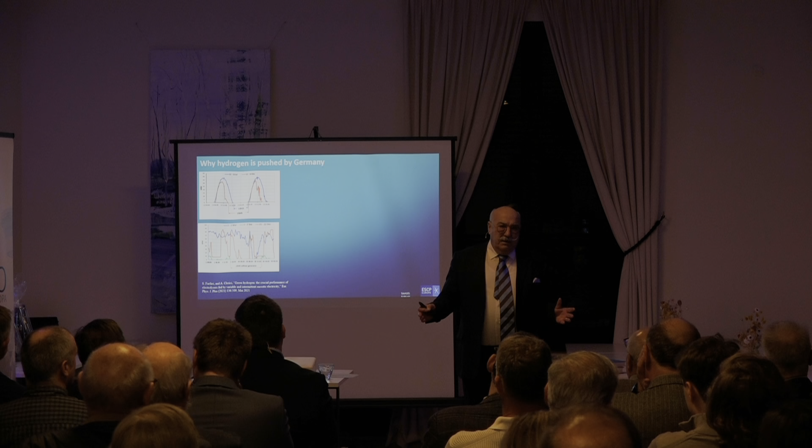To discuss hydrogen today, we need to start with renewable energy. Because if there was not the dream to produce more renewable energy, nobody would have talked about hydrogen. And you know that wind and solar are extremely variable and intermittent.

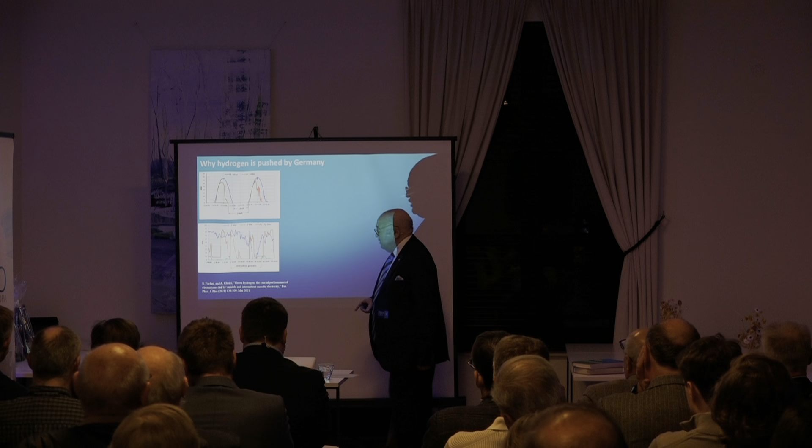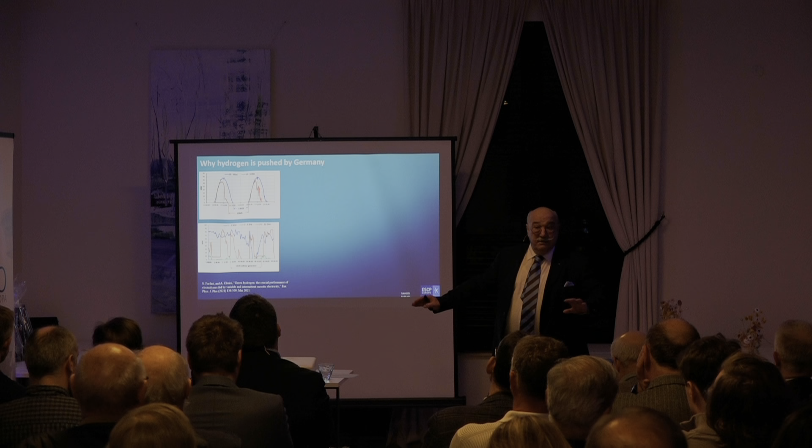In this paper that you can find on internet, which I published with an Italian colleague, Clerici, you can see that this plant in Sicily, during 15 hours 45 minutes, had zero production from solar panels. And also in south of Italy, 22 hours 45 minutes, without any production from a wind plant.

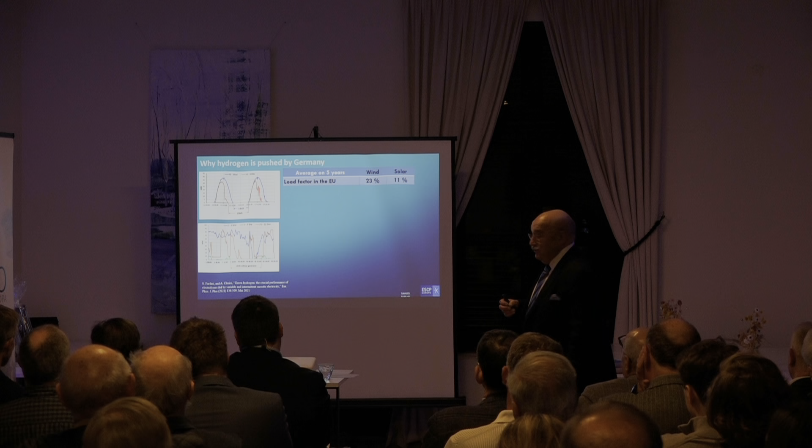So you cannot rely on this type of energy, and the factor to measure that is what we call the load factor. Please remember that. Load factor in Europe for wind energy is 23%. That means that for most of the time, 100 minus 23 is 77% of the time, you need something else, a backup.

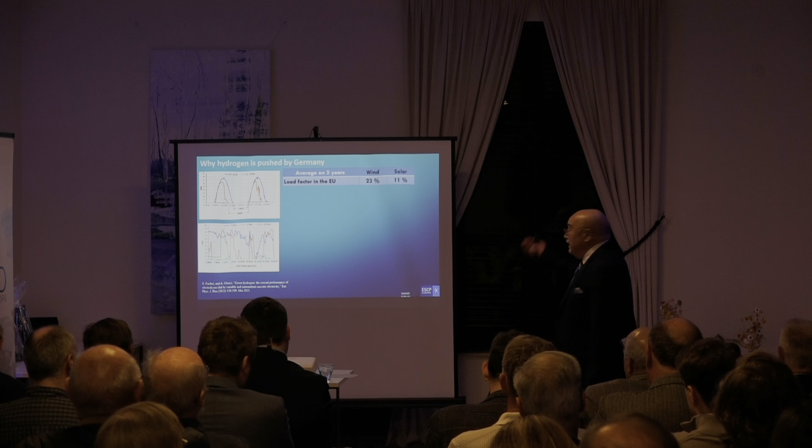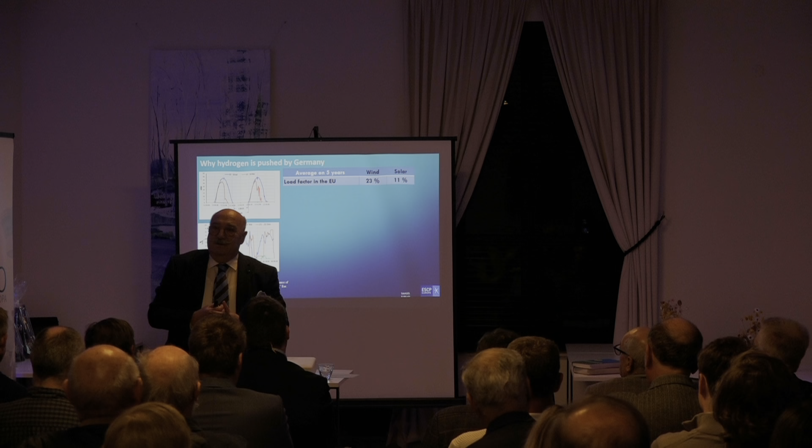And for solar panel, it's 11%. You go out, you see a roof with a house panel, and you say, oh, we don't need a nuclear power plant here. It's evident. No, 11%. Night is existing.

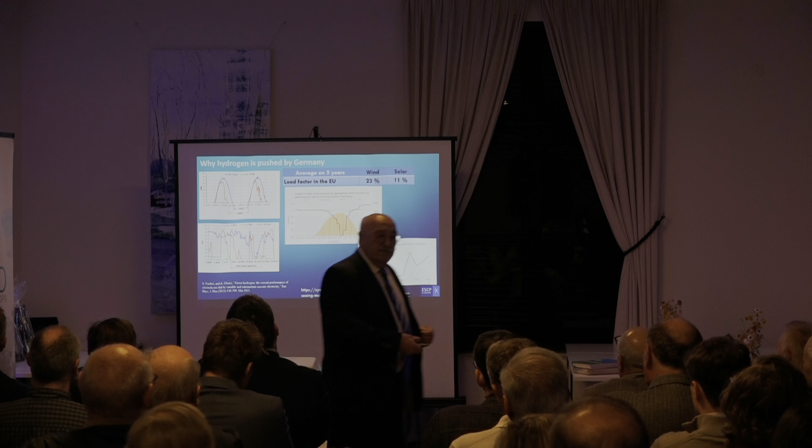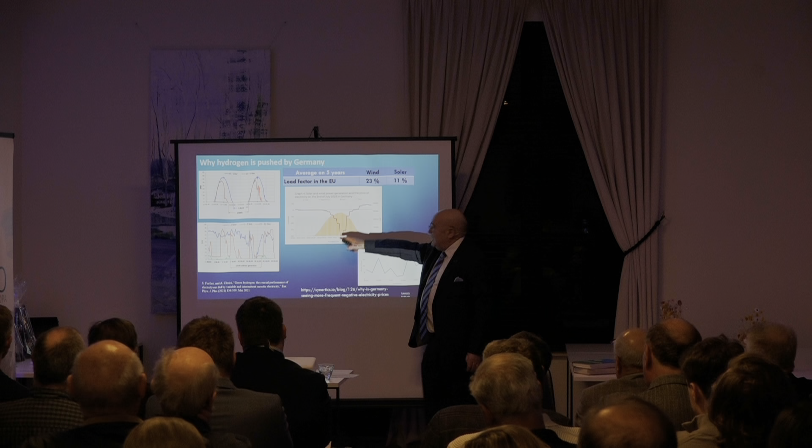That means that when you have too much wind in Germany, you are obliged to find an industry which you are going to pay to take the electricity. And you see the sun here growing up and the excess of electricity which has to be sent at minus 500 euro per megawatt hour. It's very expensive. It's why the more you produce wind and solar energy in a country, the higher is the price of electricity. It's evidence, but politicians do not want to admit that.

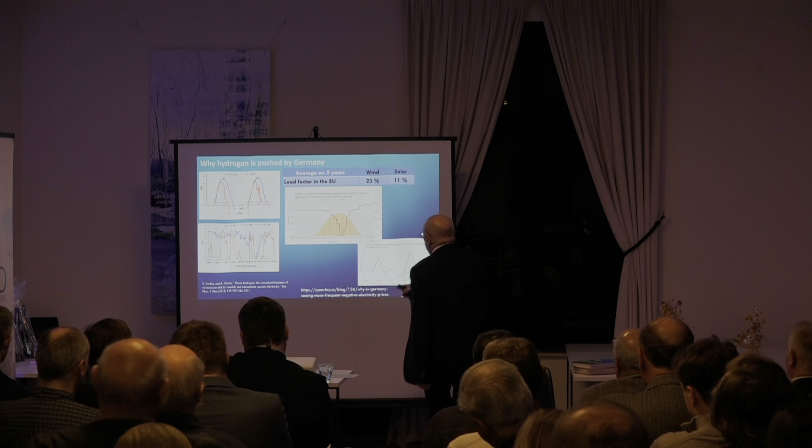So we need to find a solution. You see that it's increasing in Germany. You need to find a solution to avoid that. And the Germans, which are the champions in the chemical industry, say, oh, it's simple. With hydrogen, with this excess of electricity. It's evident, Columbus's egg.

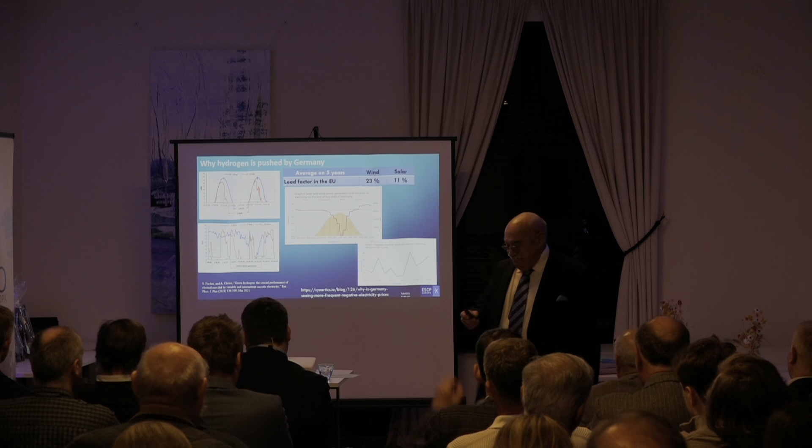The dream of hydrogen started 102 years ago. In a few days it will be 102 years ago, with John Haldane, who said in Cambridge there will be no more coal in UK. We need energy, so we will make wind, use wind, and produce hydrogen. Bright ideas, to the point that the Nazis wanted to implement it.

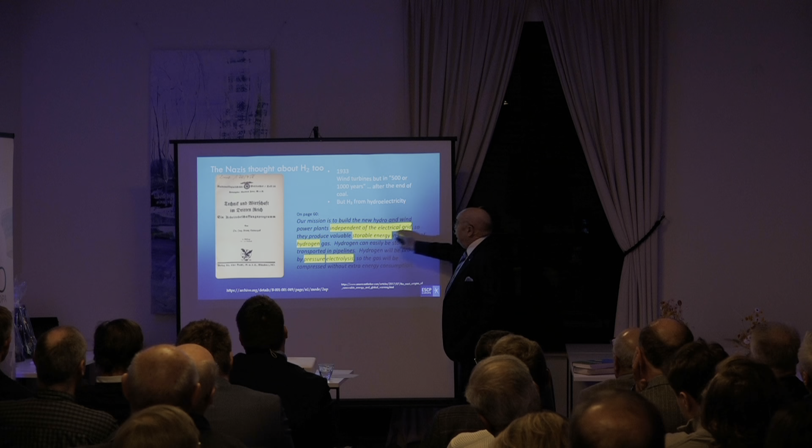And you can find in this book of Mr. Lawaczeck all the details. But then they realized, no, wind is not a good solution to produce hydrogen by electrolysis. And they said we need to have an independent electrical grid to store, not to mix that with the grid.

That's the big mistake that we are doing, to mix chemistry with the grid. Like the same with cogeneration, to mix heat with the grid. Very complicated. And therefore, you see, they were even mentioning electrolyzers under pressure. It is presented today as a novelty.

1933. Then the Nazis understood that it's not working, and they dropped everything.

We jump to the Euratom, 1957. A big change. The father of the EU said, we need cheap and abundant energy, and therefore we will need to use also nuclear energy. At the same time, on the Euratom Treaty, they created a nuclear research center in Lombardia, near Varese, in Ispra.

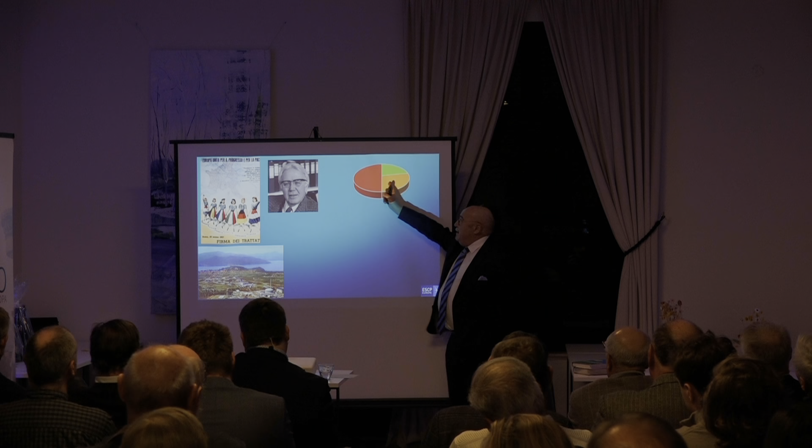This man, Cesare Marchetti, arrived in Ispra in 1960, an Italian physicist, a very bright man. He died last year. He said, we will have so much nuclear energy thanks to Euratom that it's stupid to use nuclear energy only for electricity consumption, because, gentlemen, please remember that the most important energy we use is heat, not electricity.

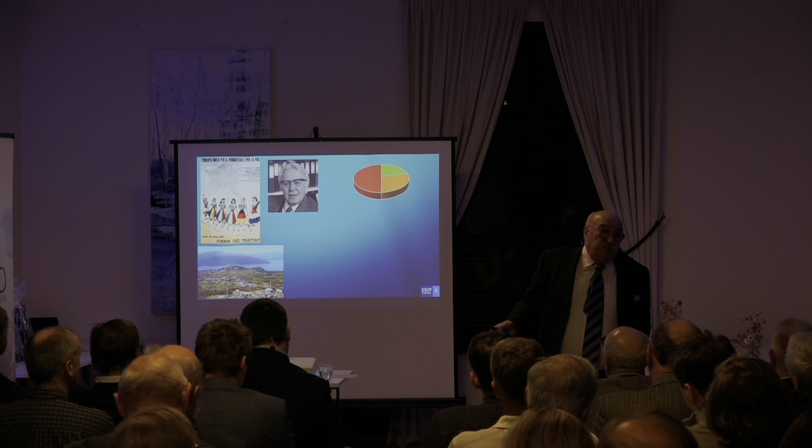Flames. Our world depends on flames. Today we depend on electricity. But without flames, there is no world. Just cook and you will see.

So this bright man said, if we have so much nuclear energy, we need to find solutions for transportation and heating. And he said, okay, there is the idea of hydrogen. And he started to work on hydrogen, and we started a lot of conferences.

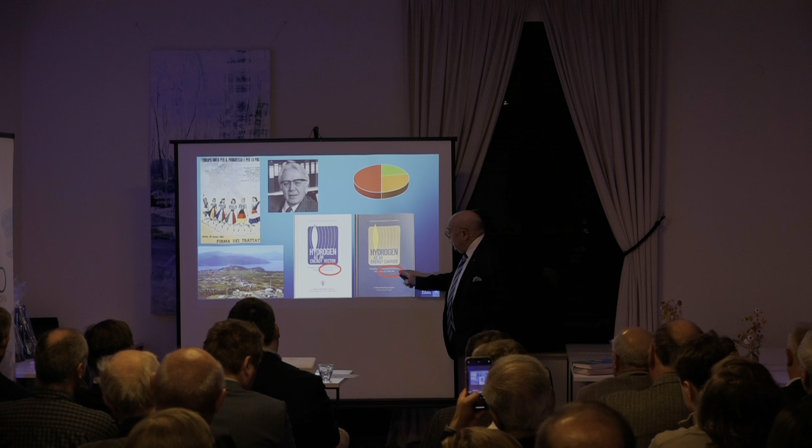This is a conference from 1980. You see, at that time it was called Vector. This is a conference in 1983. I joined the EU in '82, and I started to work on that.

And you see the colleagues who were working on that. Maybe some of you know Albert Strub, still alive, 92 years old. You can ask him what he thinks about hydrogen.

I have here a book presenting all the research of the Commission on hydrogen, including a lot of projects of Air Liquide and pressure for electrolyzers. Everything being told today is in this book. Nothing new, except the subsidies.

You will find at the end my wife with some books. In the French version of my book on hydrogen, I published completely the article which appeared in the Journal des Ingénieurs in 1979.

This man is Mr. Beghi, one of my colleagues. They invented everything for the use of hydrogen. You see, buses, cars, planes, everything had been thought of. But nothing has been materialized.

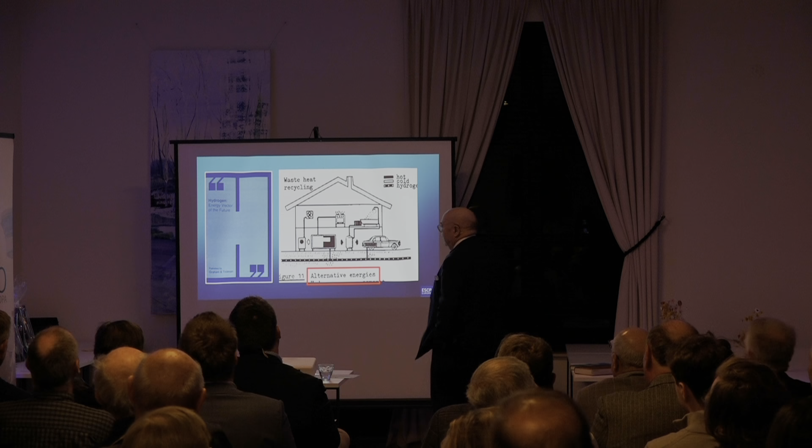Do you think that today climate change makes us more bright, more intelligent? You see that it was possible. The books were published a lot.

At that time, we didn't call it renewable energy, but alternative energy. You see, hydrogen was transported by pipeline for fuel cells in the car, fuel cells in the house. Everything would have been made with hydrogen.

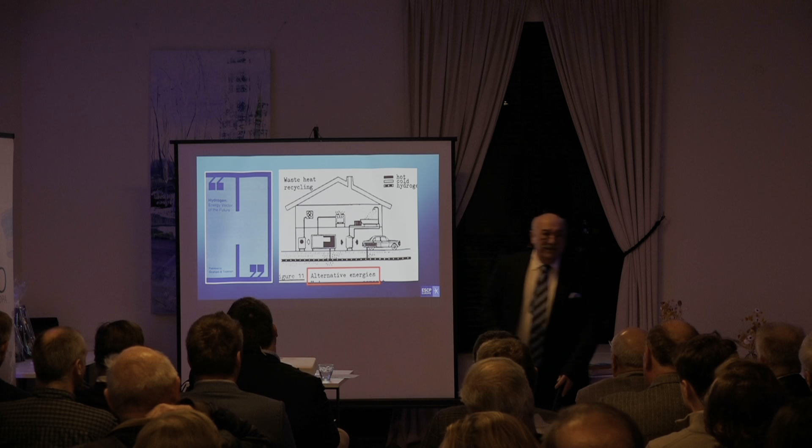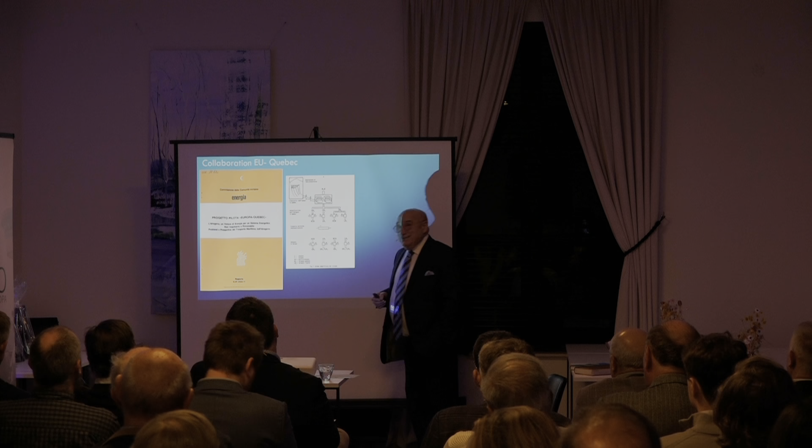We were even considering, and I was working on that at the time, importing hydrogen from Quebec, because there is so much hydroelectricity. But how do you transport hydrogen? You cannot make a pipeline like that.

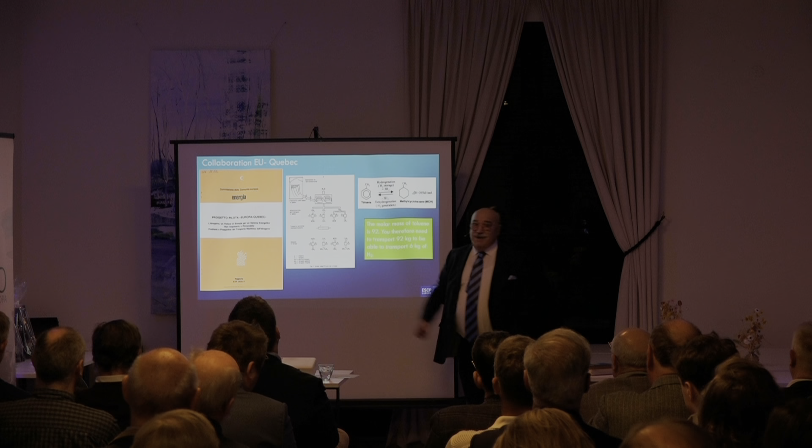So they were considering hydrogenating toluene to make methylcyclohexane and transport it, then reversing the same reaction. That means you need to transport 92 kilos to transport 6 kilos of hydrogen.

Yes, they tried to find a solution. People were serious about finding a solution. Not because of climate change, but because they wanted to find a way to use hydrogen.

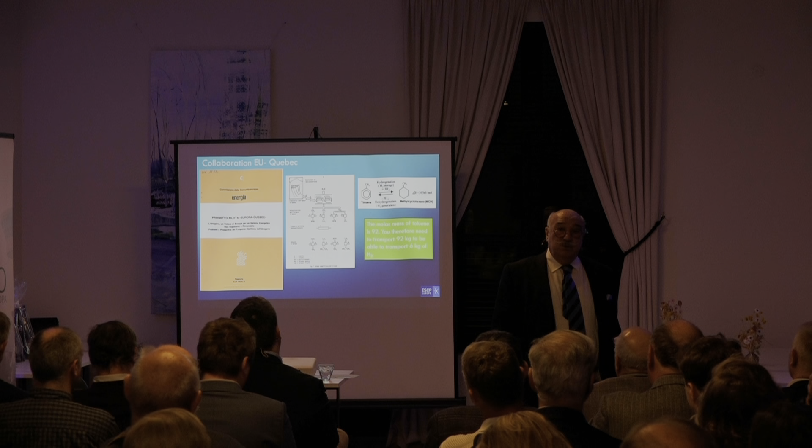So, what are the two only sources of hydrogen in the world? Hydrocarbons, the simplest being methane, CH4, and water. There are no other sources.

So you need to use those sources to produce hydrogen. Because I'm a chemical engineer, I was teaching that too as assistant professor during my PhD, as an exercise for my students. Excuse me, but if you don't listen to this, you will not understand why we should stop completely discussing hydrogen.

To produce hydrogen with methane, you react it with water. It's called steam reforming. You produce 4 molecules of hydrogen and 1 molecule of CO2. You need to introduce 164 kilojoules for the reaction.

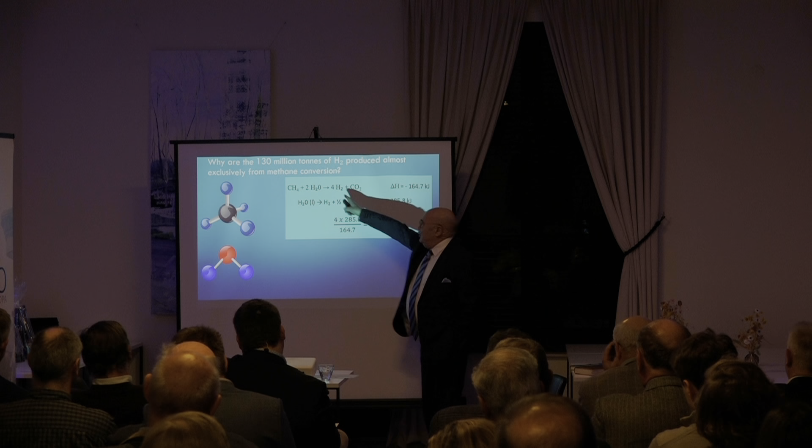To do that with water, very simple equation, H2 and oxygen, you need more energy, 285 kilojoules. But here you produce 4 molecules, and here only 1. That means the ratio of the energy is 7. If you want to produce hydrogen from water, you need to spend 7 times more energy than with methane.

If you understand that, we should stop. Finished. No more discussion. It's not 0.7, it's 700% more. You can improve your electrolyzer as much as you want, you will never be able to compete.

Of course, if the EU built a wall around itself, we could do that. But in an open world, where you need to compete with others, you should stop. No way. There are people smiling, who say, yes, go ahead, waste your money, continue to destroy your competitiveness.

Because we will continue to produce hydrogen, because we have a global issue, not an EU issue. If we believe that we are the only clever ones in the world and that others are stupid for not following us, if you believe you are a leader and nobody follows you, you are a loser.

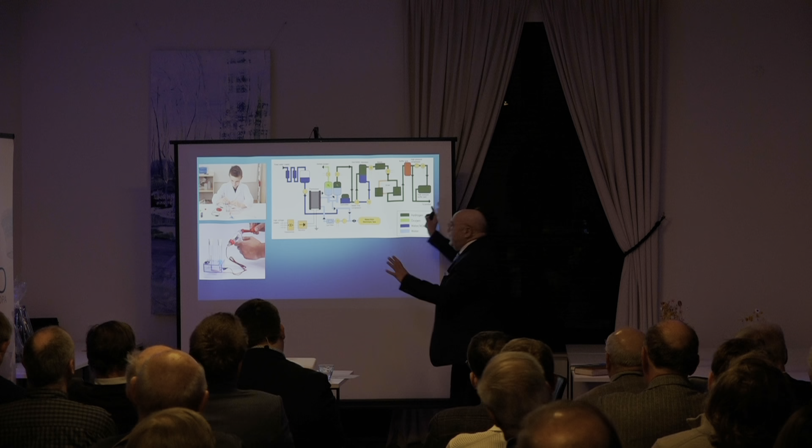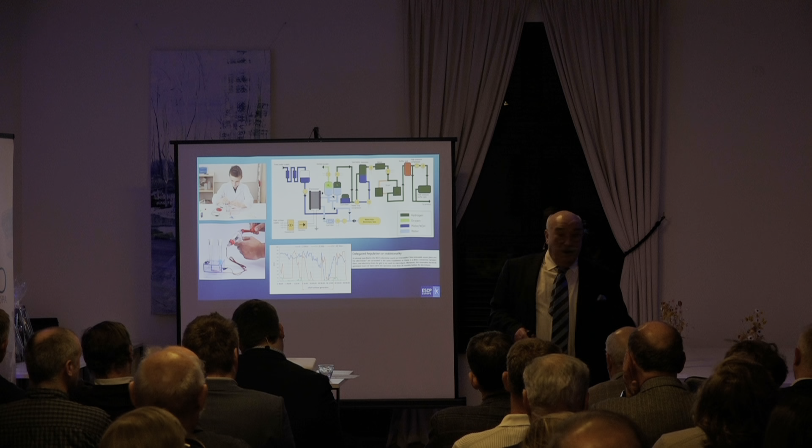And if you have to follow the wind and solar production, you will never do that. That's why, in the European Parliament, they decided the delegated regulation of additionality. That means the plant called green to produce hydrogen can operate with coal electricity, because of course you cannot rely on unstable electricity production. They put a limit, I don't remember exactly, until 2030, but for sure before 2030 everything will be dropped, or they will extend it, because you cannot rely on this type of plant to produce hydrogen.

Furthermore, it's totally inefficient. You want to store your hydrogen from the excess of wind electricity? Okay, you make electrolyzers. The theoretical efficiency of a water electrolyzer is 75%. Then you lose a little bit in compression, storage, and so on. And when you have the hydrogen to produce electricity, you pass it through a fuel cell with an efficiency of 50%. I know that because I was managing the project on fuel cells in Germany. So you end up with 28%. You introduce 100, and you end up with 28. Do you think somebody will finance that?

But it's even worse, because this is theoretical. The reality here is 66%, so you end up with 26% efficiency. Very strange. But if you combine that with the fact that the load factor of wind energy is 23-28%, it's a nightmare.

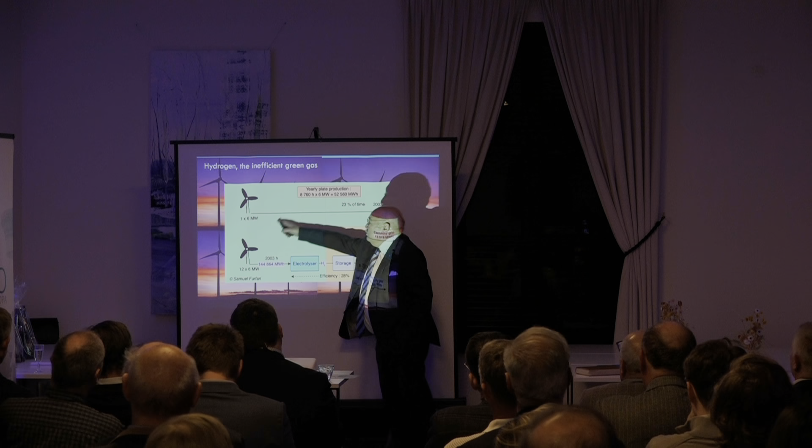Let's look at that. Imagine you have a 6 megawatt turbine. It produces 23% of the time, so it produces 12,000 megawatt hours. But if you install 6 megawatts, it's because you expect to have 52,000 megawatt hours. So you need a backup, and the backup will be hydrogen. That means the difference between this and this should be 40,000 megawatt hours produced when there is no wind. And because you have the same process with an efficiency of 28% theoretical, that means you need 145 megawatt hours here. That means you need 12 wind machines.

One will produce to the grid when there is wind. Twelve, when there is wind, will produce hydrogen to deliver when there is no wind. Who is going to invest in this type of project? Installing 12 windmills to produce the equivalent of one constantly.

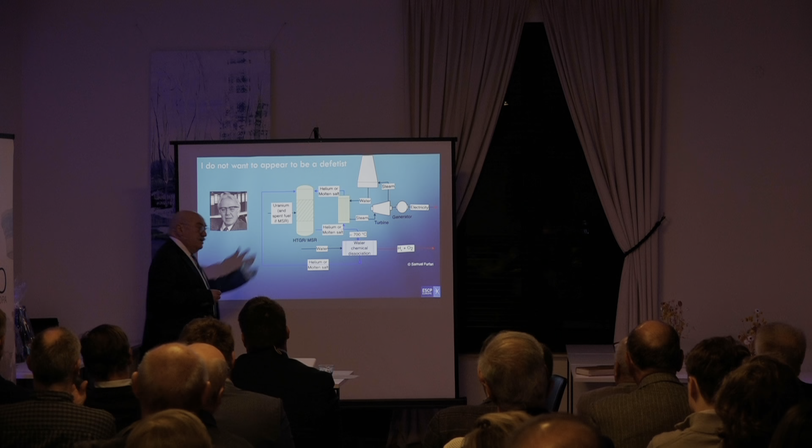They are working on that since 1960. It will come, for sure it will come. But is this going to solve the hydrogen issue? I'm not sure, I don't know. I do not say no, but I just say I'm not sure.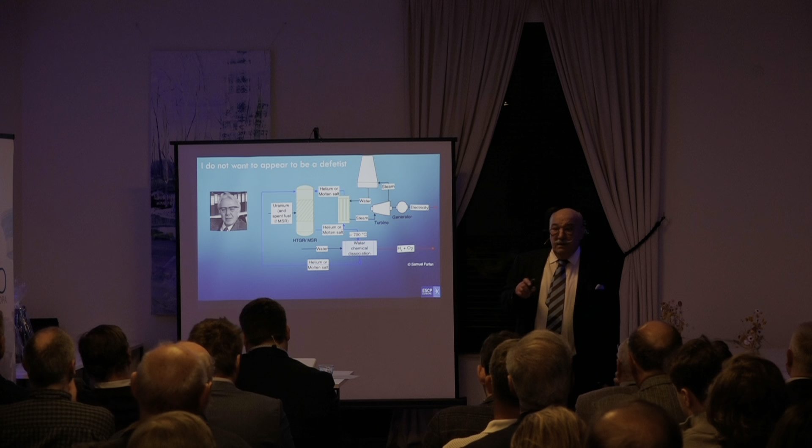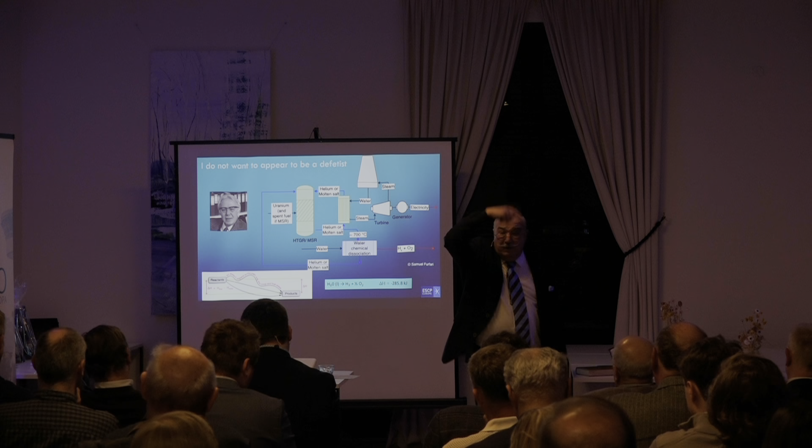Because there is a law in thermodynamics which says that the energy of your reaction depends only on the reactant and the product, whatever the route you follow to produce your product. Whatever the route you use to transform water into hydrogen, it's always the same equation that we have seen before. This will have to compete with the hydrogen produced by methane, which is 7 times cheaper.

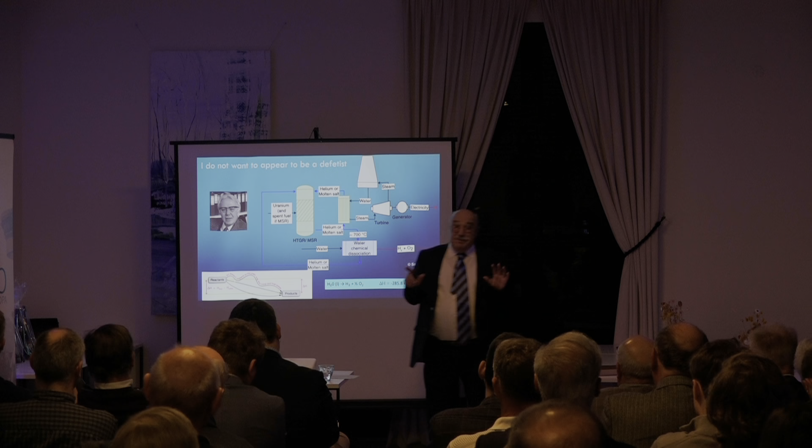If this is extremely cheap, why not? But first of all, it's not existing yet. Second thing, we will see what the cost is, and then we will see if we can compete with hydrogen produced with methane that is 7 times cheaper. So I'm quite pessimistic.

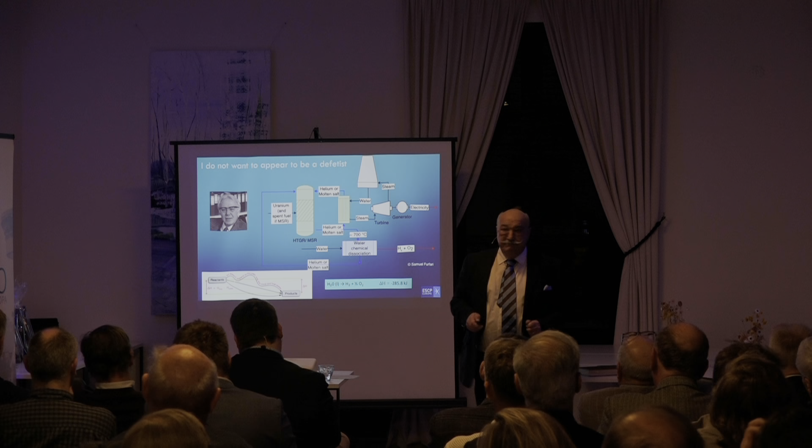But pessimistic and also very disappointed when Belgium thinks to produce hydrogen in Namibia. And I found myself humiliated when they obliged this brave man - I respect King Filip very much, because I know his father, and I respect him. I found it humiliating that he was used for such propaganda.

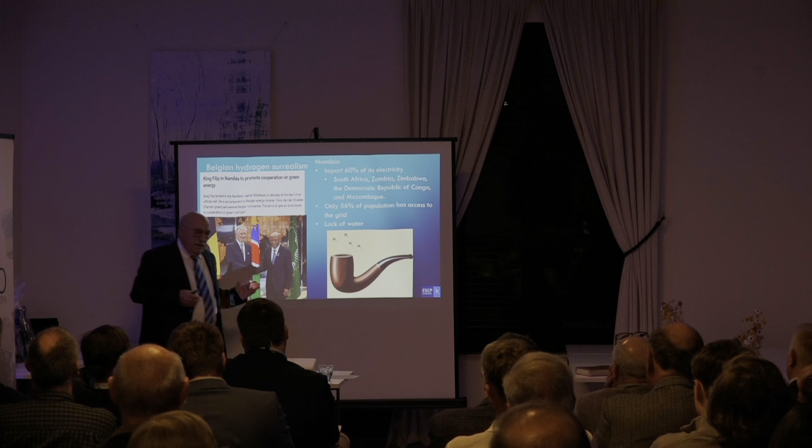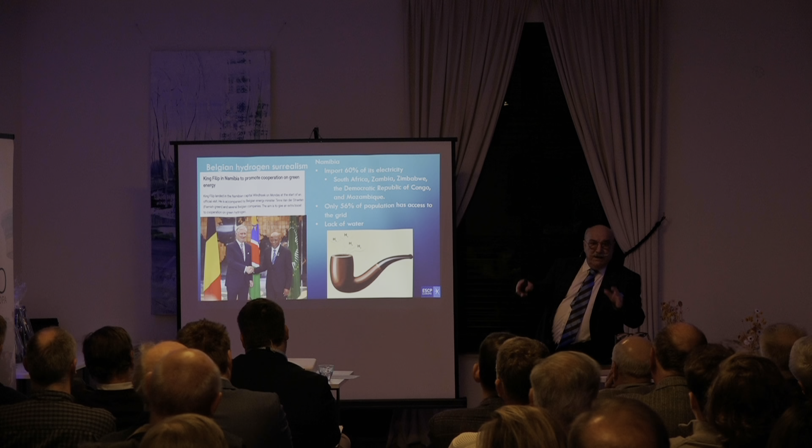Namibia, a very poor country of Africa, is obliged to import electricity from the neighboring countries. 60% of electricity is imported. And 55% of the population is connected to the grid. And like everybody in Africa, when you are connected to the grid, you have electricity only from time to time.

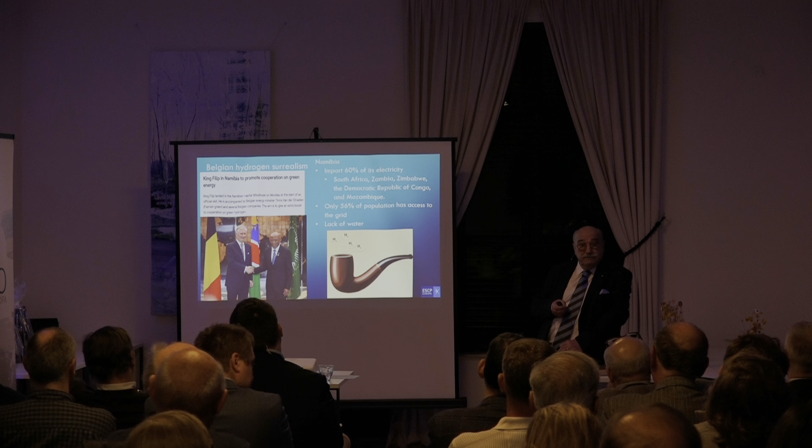And we go there to produce hydrogen for us, for Antwerpen. I wrote an article on that, I called it eco-colonialism. And therefore, this idea to produce clean hydrogen in Antwerpen with electricity produced in Namibia is very strange.

First of all, to have the water, you need clean water. In Namibia, there is no water. They need to desalinate the water of the Atlantic Ocean. You need fossil fuel to do that, producing CO2. Then you have the electrolyzer, produced with electricity from the sun.

And then you have, first of all, to liquefy the air to produce the nitrogen, for the Haber-Bosch process, and you produce CO2. You transport ammonia by boat, you produce CO2, and you arrive in Antwerpen to do the cracking, and you produce CO2.

If you want details, I published a paper on that last Friday. You will find it in Sciences, Climat, Énergie, with all the details.

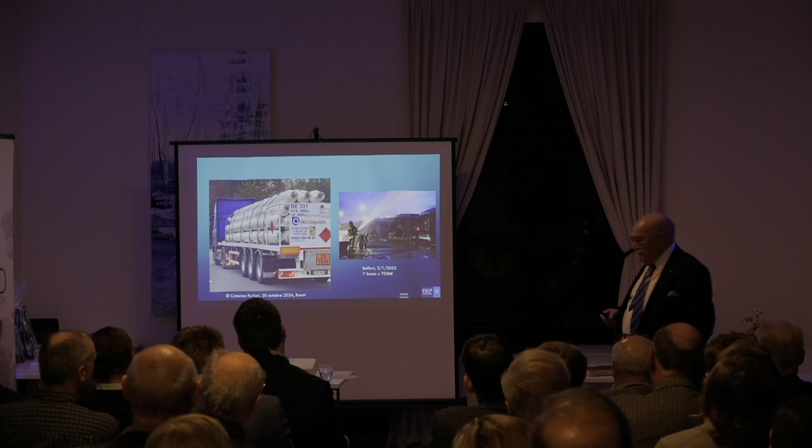Furthermore, it's quite dangerous. As you know, in Belfort, on the 2nd of January, 7 hydrogen buses have been burned. So it's very complicated to use hydrogen. Only companies like Air Liquide can do that. You need a special skill to use hydrogen, and it should not be put in the hands of everybody.

Today, the Commission forgot about that. They just want to make politics. For what? To burn hydrogen, which is the base of the chemical industry. Well, the actual base is sulfuric acid, but anyway, you need hydrogen massively in the chemical industry. So burning hydrogen is crazy, nonsense, and this will not happen in a global market, because you are right in what you say.

If we are in a global market where we have no subsidies like in the Soviet Union, then we drop it, because the Commission cannot continue to spend billions on something that the rest of the world is smiling at.